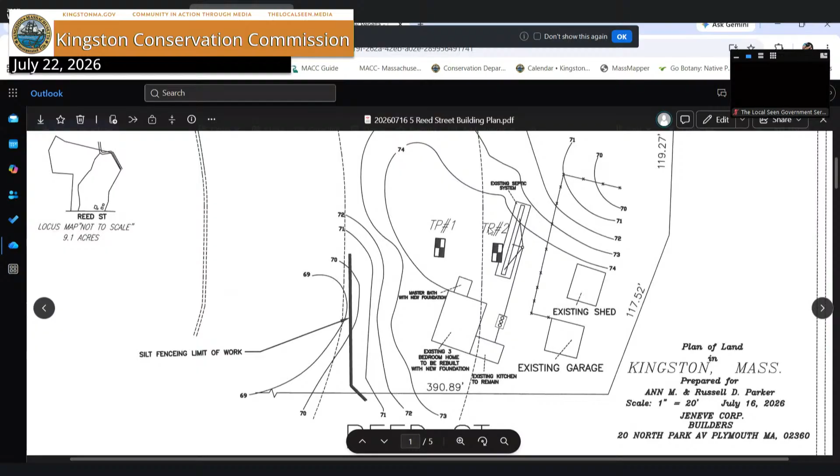It's tough to say, but this is all grass down here. The grass actually goes all the way down to the stream. So it's grass from the house to the stream, pretty much. It does slope down a little bit though.

And what he's done is put down the silt fence 100 feet before the stream, to prevent anything from happening when they dig up the house and put in a new foundation.

If you have questions, I think he'd be perfectly willing to answer them and do whatever you'd like. No, it's fine, I just want to visually see it so I can say I looked at it.

So it goes out quite a ways. Where's the stream here? Is this the stream? No, that's the silt fence. So what is this, the stream? That's probably the stream there. Okay, so basically it goes right down, this is all lawn here.

There are maybe a couple apple trees here, there was a row of bushes here. And up here was just... sorry, I'm gonna pull up the other view.

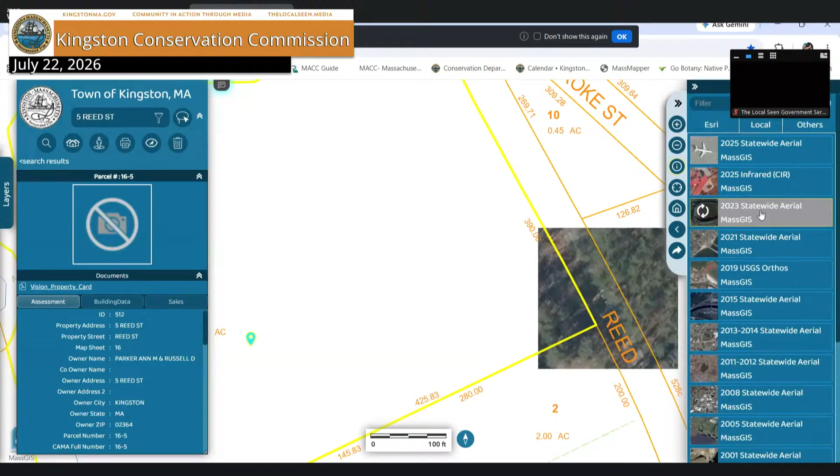So this is all lawn down here. I mean, it doesn't look like it because you've got the trees, but it actually comes down to the stream here. So you can kind of see the shadowing going to the north here, but the lawn comes down to about here.

Assuming silt fence goes right around here, basically around the tree line, the stream must be about here. It's pretty close to the border. I could pretty much show you exactly where it is off a measurement here. Measuring from here, the stream is right about here.

Okay, so it runs this way. It comes out of Reed Street and goes down to the southwest. There's, I believe, a culvert that goes underneath Route 27, and then it comes through this part here, and then there's another culvert that goes under Reed Street.

If you need, I can show you pictures, I took pictures this morning. No, this satisfies my inquiry. Yeah, and I do have pictures from the site visit if anybody wants to see anything in particular, but you've probably already seen it. So Matt, it sounds like this would be a -3 DOA.

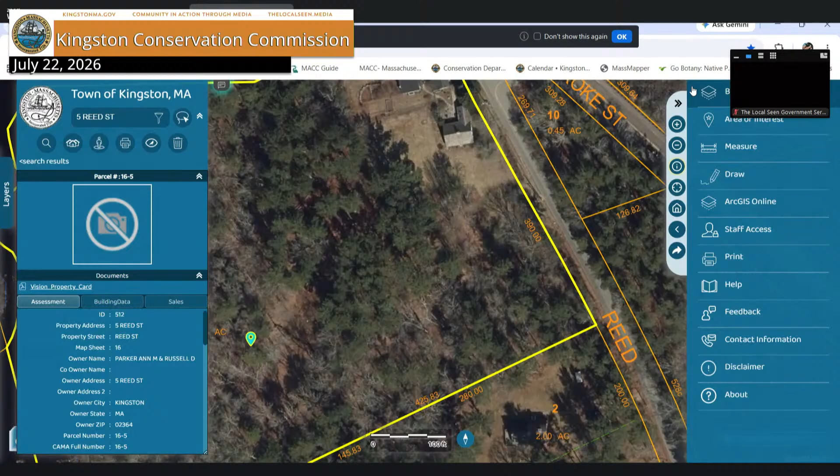You might consider, if you were going to issue a -3, you'd probably put special conditions on it, mandating that they maintain ESC and erosion and sediment controls throughout. That's really an enforcement issue anyway, but it would help get the point across to the builder. But we already talked about it, he's already taken steps, just to make sure we have the language on it.

All right, I'll make a motion to issue a -3 DOA with special conditions as described. I'll second. Made by Jim, seconded by Brian. All those in favor? Aye. No? Abstains? All right, motion passes.

Jim, can take over now. Thank you. We'll be in touch tomorrow. What does this mean? It means you're good. Okay, good? Yeah, it sounds bad, but it's good. It's just a process. Thank you very much. We'll be in touch tomorrow, we'll explain everything.

All right, so for the record, we issued a -3 DOA with special conditions as described. That motion was from Jim and seconded by Brian. It was 5 to 0.

We'll move on. You're all set. Thank you very much. Appreciate you hearing me. Thank you so much. Sorry for the speaking. No, you did fine. Is that clock right? We're at 6:53, so we gotta move to public hearings. Excuse me, we're willing and able to do anything. Oh, no, you're good. Get us to build the house. You just got exactly what you needed. Okay, I'll send you an email tomorrow, explain how everything will work. You'll be in good shape. Thank you all. Well, good luck with you. Sorry you had to go through that. We get our lives back together. I hope it goes quickly. Yes, good luck. Thank you very much. Have a good one.

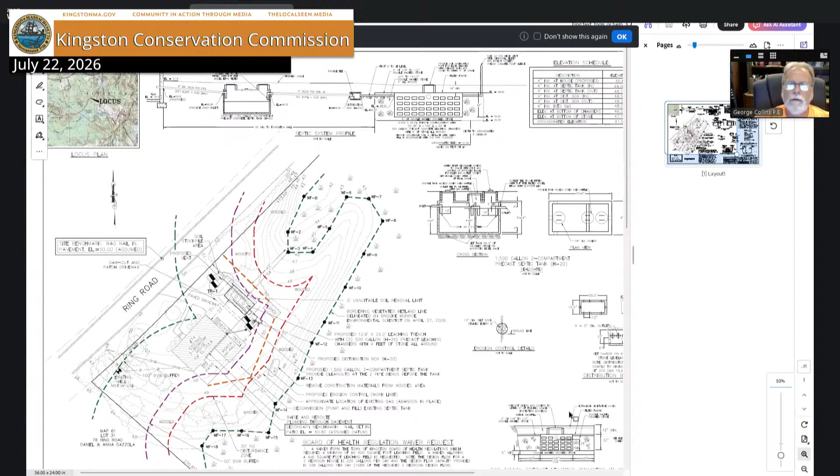So again, we have a bordering vegetated wetland that wraps around the property. The 30-foot no-disturb zone is shown in red. The magenta line is the 50-foot buffer, and the green line is the 100-foot buffer zone. So as you can see, the entire property's essentially in jurisdiction with the exception of the small area up here by the street. Currently there's a failed septic system in the backyard right here.

This is the driveway, and the new septic system's actually going under the driveway. We dug 2 test holes, it was really good sandy soils, and we were able to set this up. So we rerouted the plumbing to come out the side of the house. We were able to actually place the new septic tank outside of the 50-foot jurisdiction, and then we have the actual septic system, again, under the driveway, also outside the 50-foot buffer zone.

The system meets all the state Title V requirements. It is my understanding that the town has a 100-foot requirement, in particular for new construction, to make sure that all the septic components are outside of the 100, but obviously this is an existing property, and the entire site is within the 100-foot jurisdiction essentially.

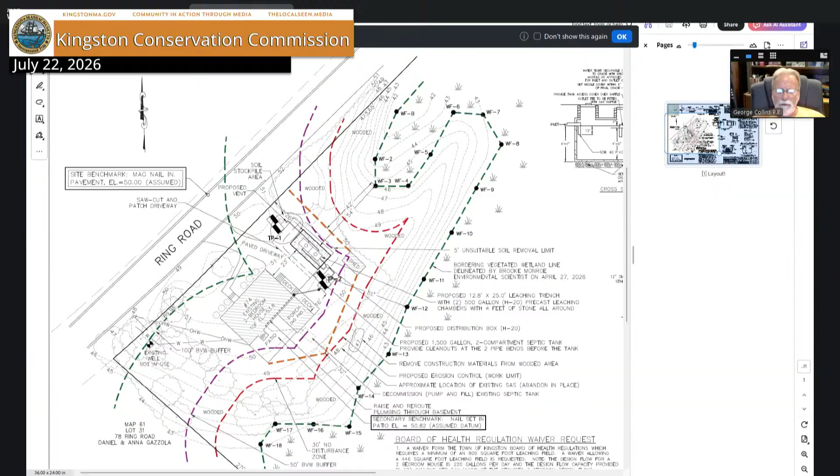All right, thank you very much. Thank you, Matt, for your guidance. And just a quick question, when do you think the order of conditions would actually be issued, just out of curiosity? So it'll be prepared for the commission to sign at their next meeting, which is the second Wednesday in August, which is the 12th. Okay, thank you very much.

If that's a hardship, shoot us an email and we'll try to speed it up. But that's typical, especially because we have 3 weeks now in between meetings. So if that's a hardship, let me know, I can see what I can do. Okay, thank you very much, I appreciate your time.

All right, we will move on to section B, 18 Smith's Lane, map 67, lot 82-1. This is a notice of intent. I will now continue a hearing for the notice of intent submitted by South Shore Survey on behalf of the applicant, Ronald Vernazaro, for the proposed construction of a single-family house and associated utilities within the 100-foot buffer zone to an inland wetland resource area and the 200-foot riverfront area at 18 Smith's Lane.

Matt says the applicant has requested a continuance to August 12th. Okay, do I hear a motion to continue? All right, we'll have a motion by Megan, a second by Brian. All those in favor say aye. Aye. Opposed, abstained. All right, so we will continue on August 12th, 5-0.

All right, move to section C. This is Drew and Seaver Avenues, notice of intent. I will now open a hearing for the notice of intent submitted by Strong Tree Engineering on behalf of the applicant, the town of Kingston, for the construction of stormwater improvements to collect, treat, and attenuate stormwater runoff which lands within land subject to coastal storm flowage and various buffer zones to coastal wetland resource areas in the roadways of Drew and Seaver Aves.

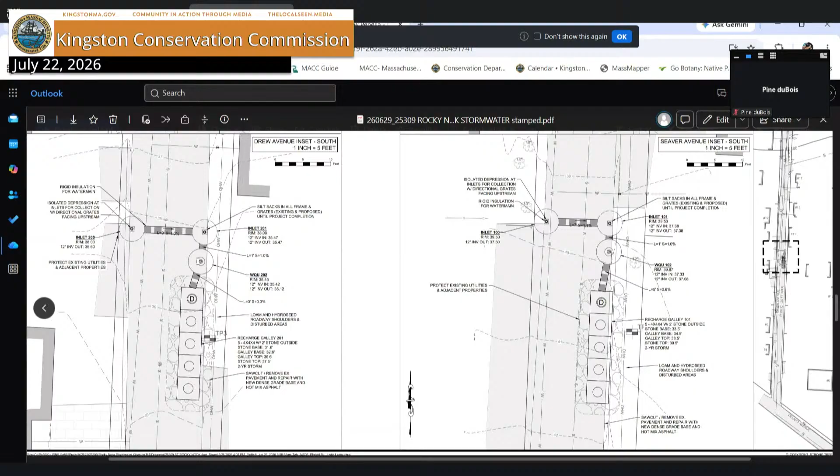Down at the ends of the streets, we have some extra pavement that we're removing, and we're going to put in stepped bioretention systems similar to the ones installed over at Delano. These will accept runoff. Currently, runoff just flows untreated right to the bay. So they'll accept runoff into forebays to collect trash, debris, and sediment, and they'll overflow then into cells.

There is a good gradient along the roadway, so we have some stepped cells, which we're accomplishing with curb to maximize surface area for these bioretentions. Both systems do have overflow recharge to get even more storage and more treatment. The upstreams are sized for the 2-year storm.

They'll fully handle a 3.5 inch rainstorm. The downstreams are sized for the water quality storm, so the first inch of runoff over impervious surfaces, and then they will overflow up to control the 100-year storm. They're designed to control the 100-year storm with weirs in the curb from upstream from the entire drainage area, which includes portions of Delano. We have native plants, some beach grass, blue stem, and various native plants in the bioretention. We have some stone overflows just to control velocities, and erosion control silt sock around the limit of work.

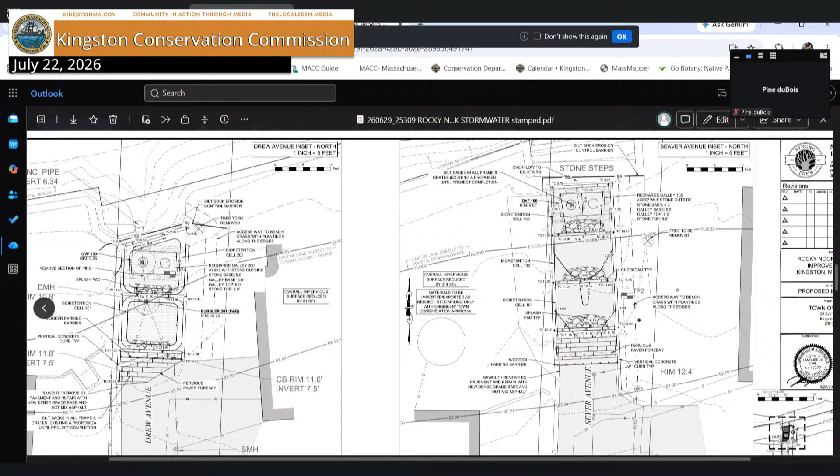Matt: I think also on both of these, maybe it shows better on a different sheet, but we had a walkway past each one to maintain the existing path. We're not changing the steps on either one of these, right? Even on Drew, we're not changing the steps, it ends at the top of the steps. Correct, so both streets still have access steps that are just within the old road layout, put in by somebody decades ago or whatever.

And this has been designed to basically, I believe it's grass, right? Right now you have grass that comes up to the road, that's within the road layout. I believe the plan is to have grass next to the stormwater feature with plants separating that grass walkway so people aren't walking in the stormwater feature, and then some sort of shrubs on the other side to separate from someone's yard. Is that accurate? Exactly. I think with our discussion with CZM, they wanted it distinguished with plantings, so the walkway will have plantings along it.

Obviously native plantings that tolerate salt.

Someone came into the office today with concerns about maintaining access over time, not losing access completely. I know when the Delano, I think it's Delano...

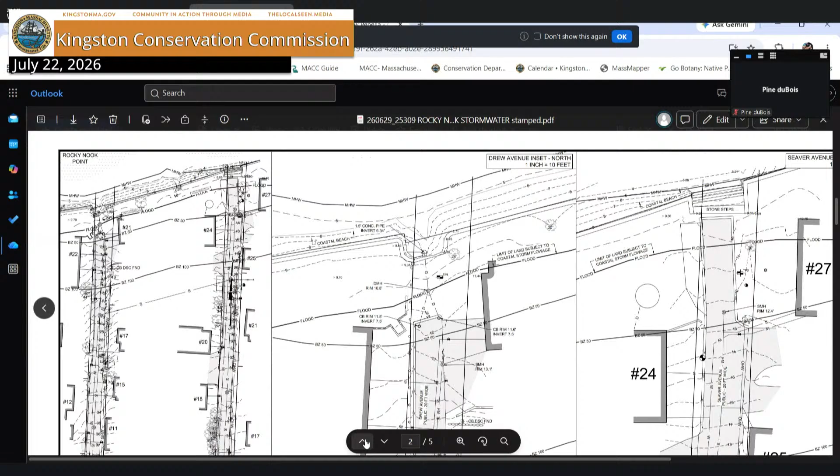We did discuss this with the highway department as well, because for storm purposes in the winter, they won't be able to plow all the way down the street to the bay, which isn't ideal anyways for water quality purposes. We don't like snow being dumped directly in the bay or plowed directly in the bay. But essentially what they said is that there isn't a better way to do what we proposed, and they can work with it. They said this past winter it would have been difficult based on the amount of snow we got, but most winters we don't get that much snow. They said if they have to send a machine down there to scoop snow and get it out, they'll do that. So I think we've covered every angle of this.

It meets all of our regulations and WPA. It may be disturbing to some of the neighbors. We've put as much notification out there as we can. We've had a few people reach out, and we'll keep interacting with people throughout the process just to see if we can keep as many people happy as possible while still being able to get the project done.

We'll open up the commission. Any comments or questions for either the engineer, Justin, or Matt on the presentation of this? Several of us had an opportunity to go on the site walk yesterday and see the layout and have it really explained, and it looks like a good improvement. It's pretty tight down there.

Yes, streets are tight. We'll open up to public comment. If there's anybody who has any questions or would like to be heard on this, please step up and identify yourself. There's a microphone. Name and address, please.

Gene Sullivan, 22 Delano Ave. My concern is, first of all, why were those two specific sites proposed? Why were they looked at first for grants when there's a major stormwater issue on Cedar Street, which is 100 feet from where you people looked, from Seaver and Drew? The road's being eaten up, and I'm sure all the construction trucks doing this project, like every other construction truck that does any work down in that part of the Nook, goes down Cedar Street and tears up that street.

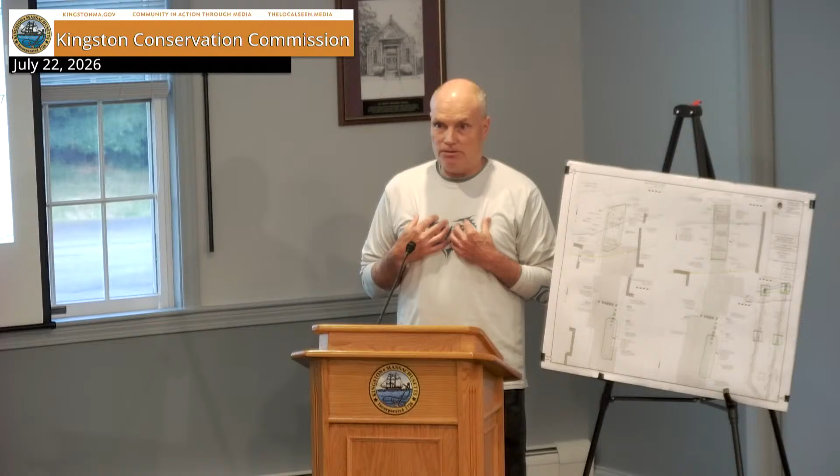The street is torn up. I have pictures of it right now. I'm pretty familiar with it - you guys were there last night, and I can answer your question. Everyone just says, well, it's a public way, too bad for you people, but I worked for Boston Water for 35 years, and if we did a construction project on a street, we would make sure that it doesn't drain into private property. You have to put catch basins, storm drains.

All right, let's just pause on that. We're going to ask for a response to the first part of the question, because we don't want to bury everything - we want to go in a linear fashion. So, Matt, could you respond?

For my benefit, I don't recall anything that we were involved with on Cedar Street, and if I'm wrong, just - no, I think what he's saying is it was a sewer project. I want to make sure it wasn't town. I get it, it's town employees - sewer project. So we had residents of Drew and Seaver Ave reach out about stormwater issues.

Their concern mainly was the scouring down the end of the stairs and the beach and that sort of stuff. But from my standpoint, a lot of what we do is trying to retrofit stormwater issues around town and make sure you get treatment. So when we looked into it, we realized there was nothing there for treatment and that it would make a good site for grant-funded work like this. I started looking at it, and what I ran into was some of the adjacent streets we could have also done were not public - similar to Cedar Street, Adams Ave is right next to these, and it's a private road.

So I can only apply for grants and do projects on public streets. So Cedar Street - you have to get up there too. Keep this very linear, or else it just goes to pot. So Cedar Street is a private right of way? That's my understanding. The way this stuff goes, because I'm no expert on roads and what is and isn't, I ask the highway superintendent or the town planner for a list of streets, and I'll ask which ones are public, which ones are private. You're 100% right on Cedar Street.

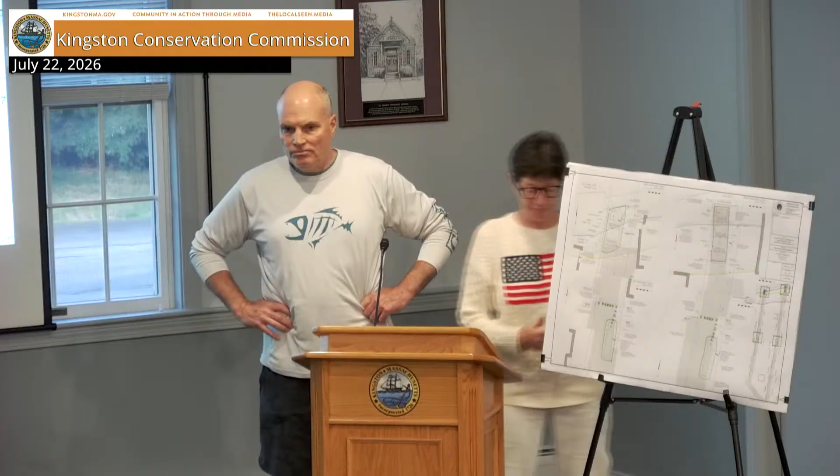All right, is anybody else like to be heard on this? Can't tell if anybody's here or got their hand up online.

Is there someone that does stormwater? I know the state requires towns to have a stormwater department or someone in charge of stormwater. Kingston doesn't have one because of the highway department. Essentially, that's my department, yeah. Right, and I see that when you put out statements about trying to correct areas for stormwater, it's a public health issue. There's a major public health issue right in front of you, 365 days of the year.

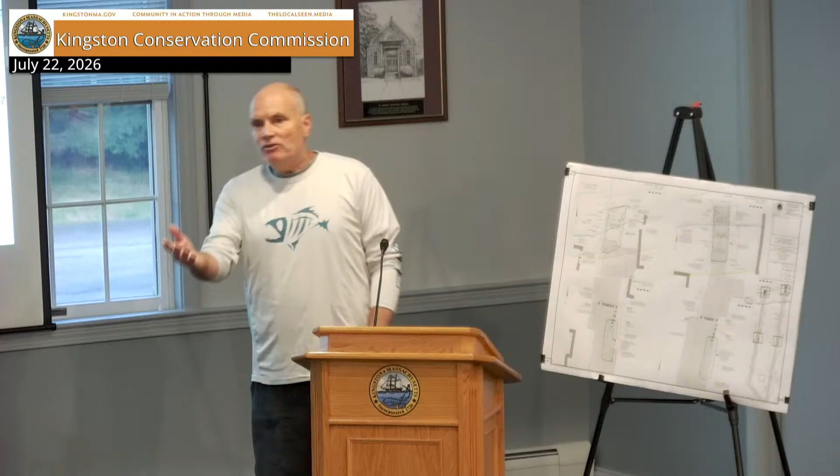It's the private road part. And the highway guy said we paved the road to drain into a private property. It seems like everyone's walking around with blindfolds on this issue.

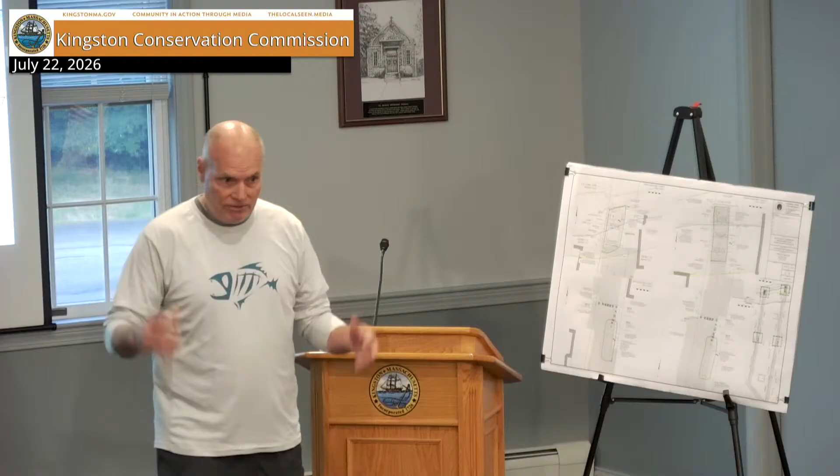But I appreciate it. We have a lane I didn't know where else to go, but I understand. I saw there was a stormwater issue and wanted to bring it in. Thank you, guys, I appreciate it. Thanks, have a good night.

Is there anyone online that perhaps wants to be heard? Let me stop sharing so we can see. Pine duBois. Mr. duBois?

Hi there, everybody, thanks very much. Just for the sake of the Rocky Nook people, when I first got my job at Jones River Watershed, the first grant I wrote to CZM was for all the stormwater in Rocky Nook. It didn't get funded. It's not just that people don't try, people do try, but it requires money and a lot of investment.

So my question is about the bioretention at Strong Tree. Is there a window for how long the water will settle there? The only reason I'm asking is my current problem dealing with mosquito control.

Hi Pine. Yes, we have an under drain. These will be standard, 72-hour max, but they'll be much quicker. We did test pits down there, and we had some test pits from when they did the sewer. It is rocky, but fairly sandy. It will be under drained, and Drew Ave has the existing outfall that will connect to.

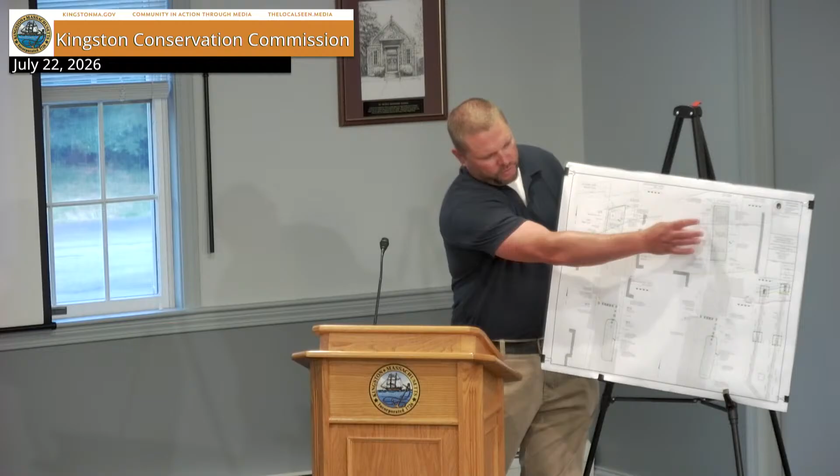Which road, I think it's Seaver? Ledrew. Any parking within the right-of-way is going to go away. We're not taking any driveway access. Both will be able to access the driveway and should even be able to back out towards the ocean on both streets.

We kept all the driveways where you'd have turning radii, but parking, sometimes they park at the end of the street, you can't do that anymore. Right.

Any additional questions? Don't see anything.

What do you think, guys? Are we ready for a vote? Excuse me, Matt, did you have a question about the O and M plan, that we should have it before closing?

COC, yeah, we'll have it. Justin will be putting it together at the wrap-up of construction before we file for a COC. The specs I have done. We'll tweak the plans after this, and put together the O and M.

Are we ready for a vote? Are you wanting to close the hearing? We would have to. If we're ready, or this is where somebody would say I move for a continuance. I'll make a motion to close. Motion by Brian, second by Marilyn. All those in favor of closing the hearing, say aye. Opposed? Abstained? All right, so we close the hearing, 5-0.

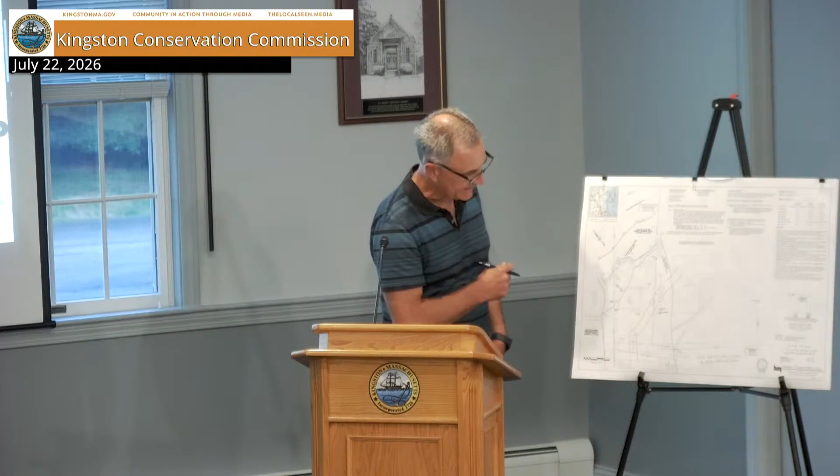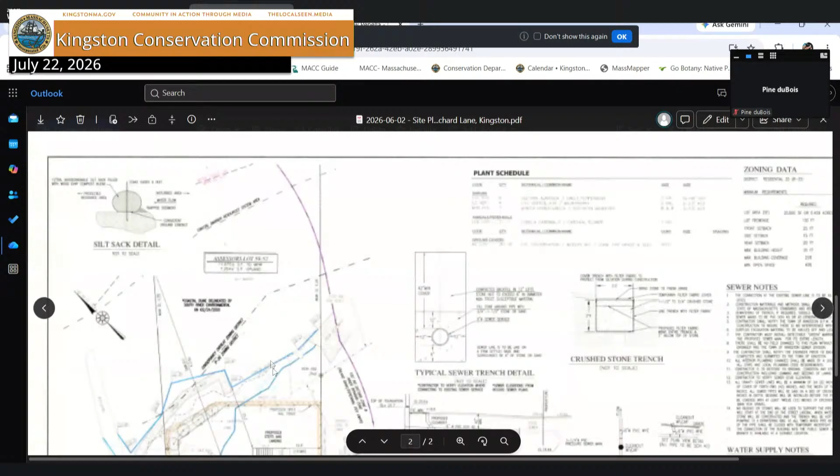We have the resource areas delineated by Brad Holmes, depicted here on the plan. The existing foundation is about 19 and a half feet off of the coastal dune delineation line, and as mentioned, within the land subject to flooding. It is currently in a state of disrepair, as people on the site walk saw yesterday, with toilets and sinks falling through floors and in dire need of being replaced.

Mr. Guidoboni has come up with a house design where the house is narrower than the previous house, which was about 34 feet wide. This proposed house is 28 feet wide. He would also like to pull it closer to the property line. We have a 15-foot zoning setback, so we'd like to bring it about 15.4 feet from that property line to the east, or southeast. We'd also like to pull the house forward towards the existing roadway, Old Orchard Lane. By doing this, we're able to relocate the foundation entirely outside of the velocity zone, elevation 13.

We would also like to elevate it a little higher on a foundation so that the basement slab, which is also a garage under slab, is at approximately elevation 13.7. So our foundation slab will be elevated above the flood zone, eliminating the need to deal with being within the flood zone.

There are 2 parking spaces proposed to conform with zoning requirements. These will be crushed stone parking spaces, accessing the existing crushed stone and partially paved driveway coming in from Old Orchard Lane. Again, those will be crushed stone.

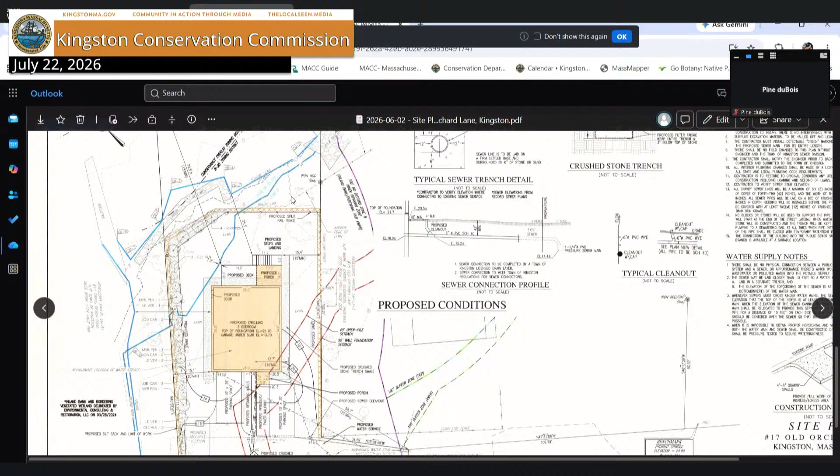My take on this, we haven't dealt with this before. We've had several filings in this area that we really haven't paid much attention to what this is as a feature, partially because everything in this area is already very developed, including this particular property. So rather than get down, and the commission absolutely can if they want to, but if the commission wanted to get down to exactly what this feature is, my recommendation would be go to peer review, because I have no idea. I don't know where this stream comes from, what its headwaters are, what its total drainage area is.

But I don't think the commission needs that to make a decision on a filing like this. I don't think it makes a difference whether it's an intermittent ditch or a perennial stream, where we have historic legal development up very close to it, and a project that is improving conditions and adding restoration plantings closest to it.

If that's the way the commission feels, I'd suggest putting a special condition specifying that you're not affirming that resource area type. The boundary to me looked accurate, I just don't know what it is as far as the stream. So I thought that was worth mentioning and can be laid out in special conditions.

There was an NOI support memo that came from ECR. It typified the stream and discussed compliance. It did mention that this met the standard of maintaining an existing structure, which I disagree with.

If that's the point he was trying to make, then from a procedural standpoint, I thought it was worth calling out as a redevelopment of an existing structure. But I do agree with the point that the proposal increases the distance between the structure and the stream and other resource areas, and provides mitigation plantings in between.

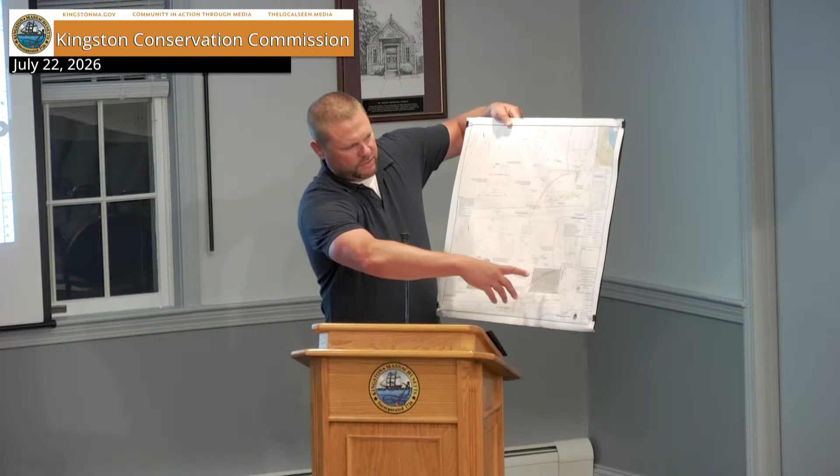Justin Lamero, Strong Tree Engineering, again for Susan Woodworth at the Kingston Rec Department. Pretty straightforward project. We have a wetland on the other side of the tracks here at Grays Beach Park. The tennis court is shown in both the existing and proposed plans, along with the basketball court, which is outside buffer zones. We're replacing the tennis court in the exact same footprint. We'll remove the existing asphalt, regrade to get out some of the low spots in the court, and then repave. The fence will stay in place, and we're not adding any impervious surface. We have silt sock around the entire perimeter, and we'll put silt sacks in the catch basins adjacent to the project.

Matt, do you have any comments, please? Sure. I get into discussions of the stream and how it is referenced on several other filings.

I wrote, the work proposed in this filing is not within riverfront area because the riverfront area runs parallel to the stream and ends where the stream ends instead of wrapping around the bottom, so this is a buffer zone only project, because the stream comes out of a culvert just past where the court is.

Proposed work limited to the area of the existing tennis court will not increase existing impervious surface or cause other disturbance within jurisdiction. Work is mostly outside of the 50-foot buffer zone, with around 59 square feet of the court inside the 50-foot buffer zone to the southern BVW.

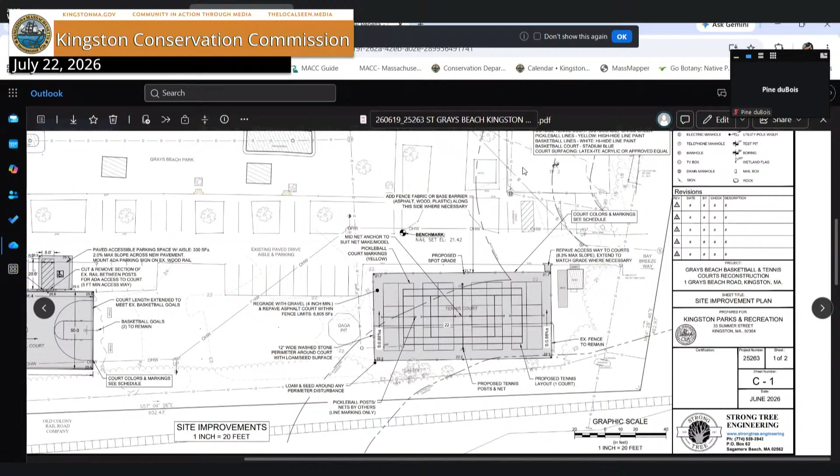Okay, we'll open up for discussion. Any questions from the commission? Is there anybody from the public that would like to be heard? Is that Matt? No, that's his hand thingy.

So Matt, it sounds like it's a pretty straightforward project, just removing and replacing tennis. This is the CPC project, right? It is, correct. Yeah, so I'm like, why do I know this project? I was gonna say, this is probably easier than even the playground one was. It's just repaving, but you are grading, you're removing and grading. It's just, you're putting back exactly what's there. You're protecting downslope. It's very easy.

Are you doing the restriping as well, like the line painting? It's not planned to restripe the parking lot. No, the tennis court markings? Oh yeah, the court, we're removing the asphalt and it'll be painted similar to Reed School, the blue. Okay, have you been up there? I have, yeah.

So Matt's recommendation is positive 2B and a negative 3A determination of applicability. So moved. Do we have a motion? We have a motion from Megan. Do we have a second? Second, by Marilyn. All those in favor say aye. Aye. Opposed? Abstained. All right, that motion carries for a positive 2B and a negative 3 determination of applicability. Thank you very much. Thank you.

Good night. Thank you. What do you need? That motion was 5-0. Oh, I'm sorry.